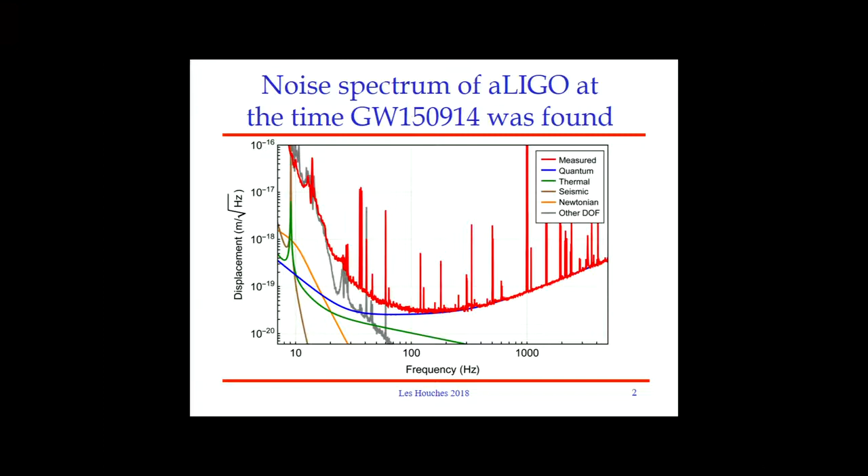Now, after paying everyone a compliment, I want to tease everyone. I prompted you all last week to be prepared to challenge Stefan when he came here with the question of how much is understood about how often we get to the modeled low frequency noise and how hard it is to achieve that. So please hold his feet to the fire, or maybe their feet to the fire as designers, to make sure that if the taxpayers of Europe or the United States or the world are going to spend $1 billion on one of these low frequency detectors, it's going to work at low frequencies. So please do this with both boldness and humility.

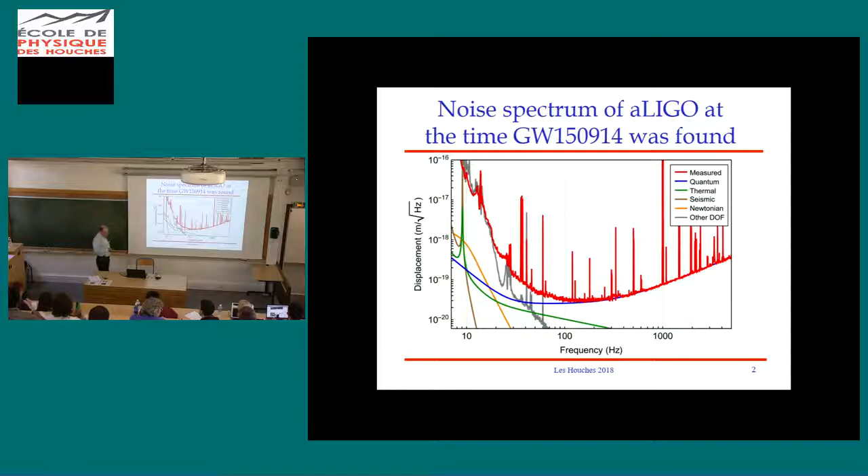In the course of my prepared material today, I'll say something else about boldness and maybe lack of humility. So to motivate what I'd like to do to finish up my presentations for the school, I went back to a slide I used a few days ago.

I tried to make the point that gravitational wave detection is so hard as to be considered nearly impossible. Looking back at that, we've talked together about building the raw sensitivity, how an interferometer can be shot noise limited, and how the shot noise can be made low enough to achieve this otherwise astounding precision. I had one mealtime conversation over this, but didn't make much prepared material.

If you're still wondering about that, we can talk more about it over lunch or dinner, about how we can do this with things made out of atoms. We also talked about how to tame the much larger mechanical noise sources, at least several of them, featuring seismic noise and thermal noise in particular.

But today I'd like to talk about a subject that is mainly about achieving this last challenge on my list of nearly impossible challenges: namely, how to do all of this given that in order to have a quiet, well-isolated interferometer, and one whose response to gravitational waves we can understand, we need to use free masses. But nevertheless, we need the interferometer to work as reliably as Michelson's original interferometer, where he and the people who helped him built incredibly stiff, beautiful, rigid mounts to hold all the optics. So that's actually a really interesting challenge.

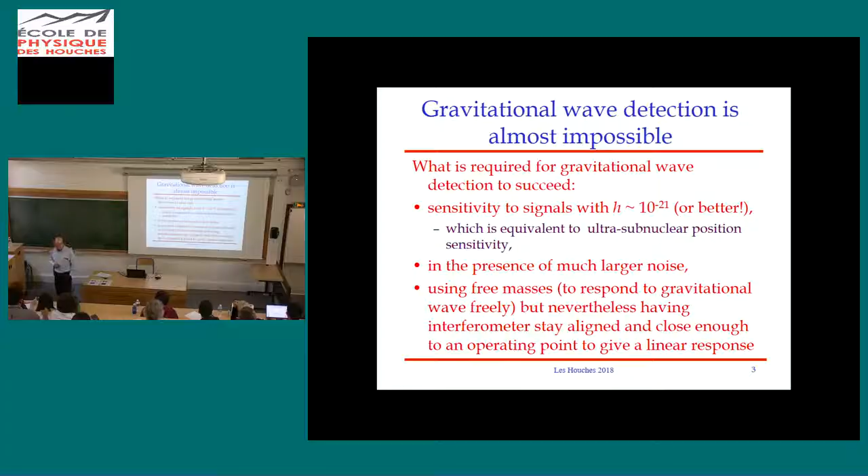And it's also a challenge that involves, I think, some of the most beautiful technology in our field. This is the field called control systems. By the end, I hope to convince you all that this is both magic and beautiful—magic in the sense that it seems like it shouldn't work, beautiful in that it's incredibly powerful, and powerful in a way that we as physicists can understand.

I'm making the 'we as physicists' point because it's a matter of great pain to me that physicists aren't generally, in our standard education, taught anything about this. It's relegated to departments of engineering, at least in the United States. You all from other educational systems can tell me if it's any different elsewhere, but it's too beautiful to be left to engineers. Physicists should claim this material, so I'm on a campaign for that.

So after I talk about control systems in the abstract, I'll walk us through a few examples that play roles in various subparts of gravitational wave interferometers. The simplest one to look at is active damping—damping with a control system rather than with material friction. And maybe we'll work through a bit of how active vibration isolation works.

But then I want to talk a bit, not so much from the point of view of formal control design, but from the point of view of war stories, about locking some of the really twitchy aspects of gravitational wave interferometers. One of them is just an individual Fabry-Perot cavity itself; the other is a whole interferometer made up of multiple coupled Fabry-Perot cavities. By the time that's done, I think you'll have a sense of how we've come up with a rigidifying function without actual rigidity.

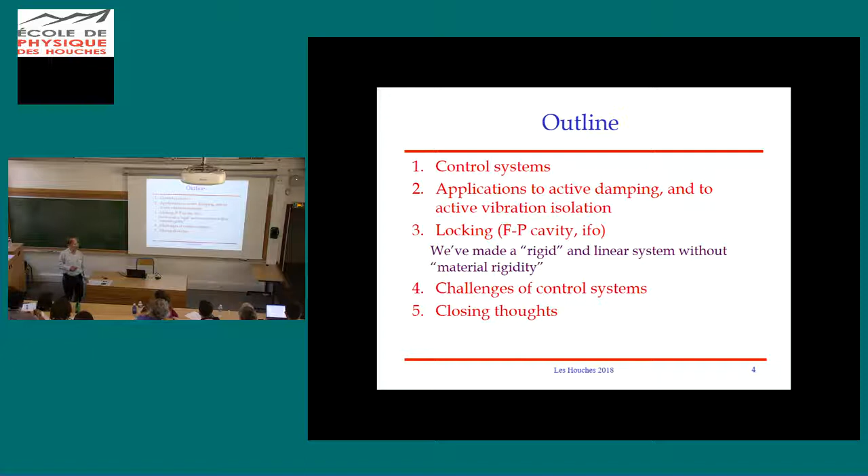We'll see what the challenges are, and then I'll try to wrap up a bit.

So first, let me just show you a few pictures of things that we know already based on things we've talked about before that we need to control. And one of them is the length of a resonant cavity.

You can think of this, if you want, as the world's worst scale drawing, representing a 4-kilometer long arm cavity. Here is an end test mass with its highly reflecting mirror, and here's an input test mass with its partially transmitting mirror, so light can couple in through the substrate.

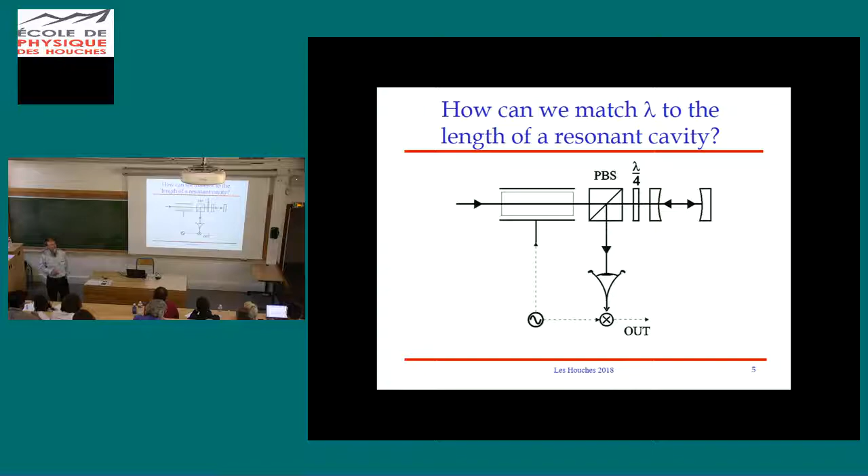I won't, at this moment, tell you exactly what all these components are, other than to say this is a schematic representation of how you can set up a system that can do two functions: one is to sense whether the cavity is on resonance or not, and the second, not so well diagrammed here, is to somehow act on the cavity so that if it's not in resonance, to drive it towards the resonant state we want to keep it on. So this is a system we'll want to control, and I'll talk something about it.

Here is a very simple looking diagram, a sketch of a test mass suspended as a pendulum, and every interferometer design that I know has at least one pendulum stage, because this is the best way to get low thermal noise and seismic isolation. But remember, if we want low thermal noise, we want very high Q. And when I showed you the benefits of high Q in a graph of a thermal noise power spectrum, obviously, we want that high Q.

We want to put all that half kT's worth of energy in the resonance and make those wings very low. I don't think I sufficiently reminded you all that, but I think we did talk about it in response to a question: that a high Q pendulum means it gets disturbed for any reason and it oscillates for a really long time.

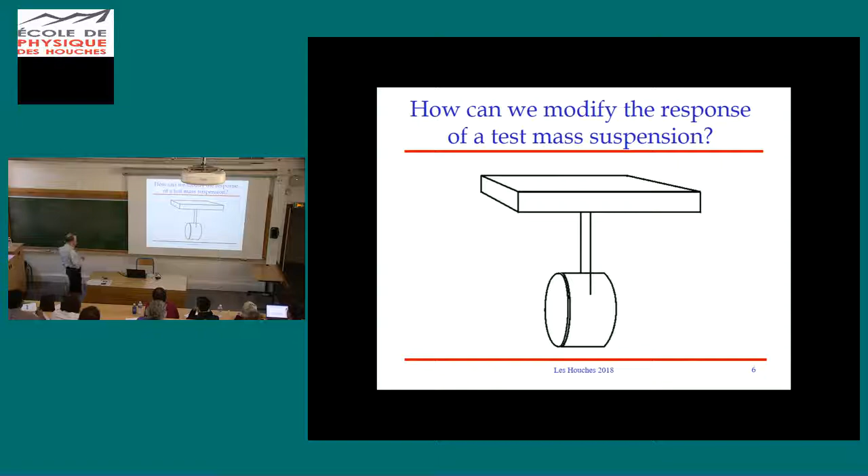The notion that we can let that ring down once and never disturb the test mass suspensions again is unrealistic. I've never seen an interferometer go without disturbances for more than a day or a couple days, and some days are much worse than that. So the idea that maybe we want to somehow, in some delicate way, modify the behavior of a test mass suspension while not ruining the noise properties that led us to that design in the first place is something we'll talk about.

As yet another example, let's think about whether we can supplement the vibration isolation you get from connecting masses through springs, maybe cascading several such stages. That's our prototype of vibration isolation, but maybe there's a way to use control systems to modify the properties and actually improve the vibration isolation beyond what's easy to engineer with strictly passive mechanical techniques.

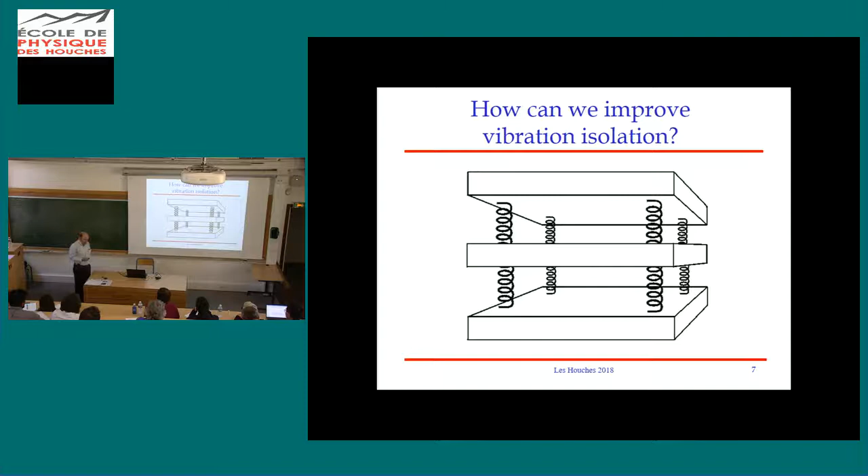I'll at least suggest that, and maybe more. And finally, we will spend some time talking about how we get the equivalent of this stone table and these beautifully rigid mirror mounts of the advanced Michelson interferometer from 1887, without the rigidity and without the mounts, where adjustments can be made automatically and remotely, not by some assistant having to go over and turn a screw.

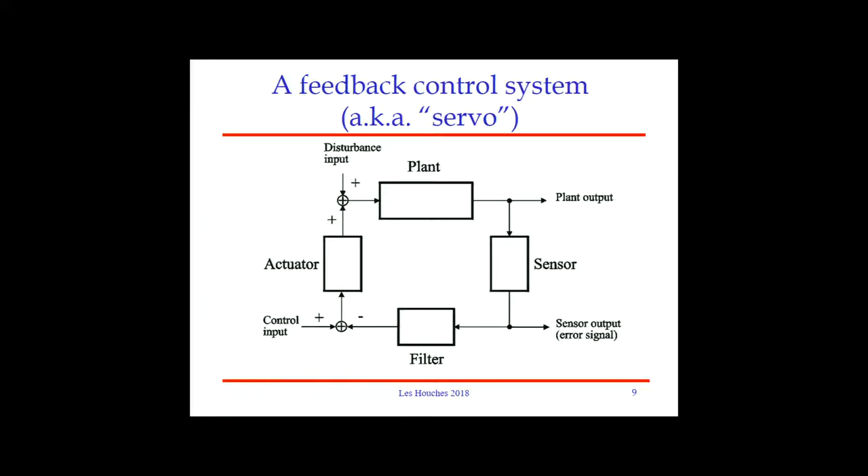Here is a diagram where I want to introduce the key concepts of what a control system is, based on feedback. I'll sometimes call this thing a control system, sometimes a feedback system for reasons that will become obvious in a moment, and sometimes I'll call it a servo.

That's slang. Servo mechanism is the longer term that some journal editors will insist you write in a paper. The word servo itself is grabbed from Latin, I believe, servus, meaning slave. So this is a kind of automatic slave that you don't have to pay to do work that you would otherwise need doing. We're going to stare a lot at this diagram, so let's get familiar with the different generic parts.

The terminology is pretty standard in the servo engineering literature, so it's worth learning. First of all, I should step back and say, what are these rectangles and lines? This is a so-called block diagram, and in it I'm going to represent a system that has an input and an output and a well-defined linear relationship between input and output. I'm going to think of a generic system as consisting generally of 4 different linear systems.

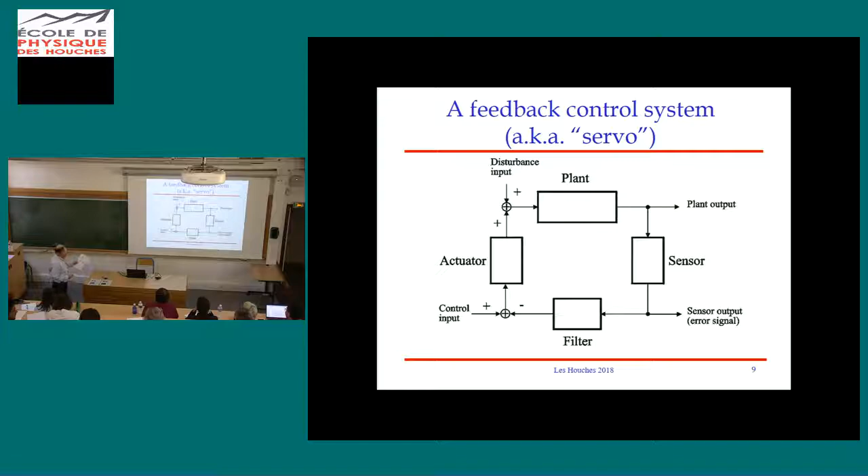Let's talk about some goals. This is actually a really important goal for us, even though it seems like the most boring thing in the world. One of the most important uses of feedback or of control is simply to hold a plant near a chosen operating point. Sit still, please, okay?

Sounds boring, but we can already see why it's so crucial, because we are looking for these influences that are as close to zero as anything measured, in an environment that would tend to make the interferometer move a lot. Part of the reason that's so horrible to contemplate is we are making our measurements of differential arm length or gravity wave strain with a readout system, those resonant Fabry-Perot cavities, that only give a linear phase response to a length change in a very tiny region. So unless the interferometer is sitting very close to the operating point, not only would you say there's a lot of noise, the signal is absolutely meaningless.

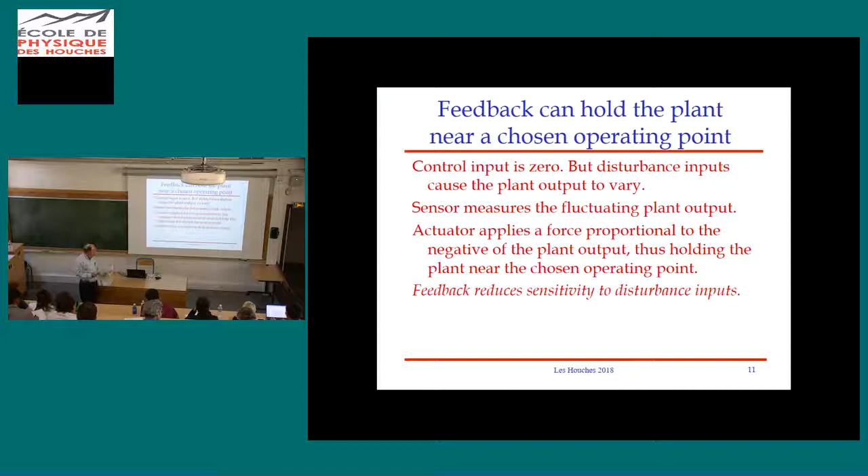I'll remind you of that again when I show you the characteristic response of a cavity readout system. But it is crucial to reduce the sensitivity of the plant that is a free mass interferometer, reduce its sensitivity to disturbance inputs. Otherwise, we can't make any sense of the output. Another kind of goal for feedback is to simply modify the dynamics of a plant, to take something that's a high Q oscillator and make it behave as if it's lower Q without wrecking the noise advantage of the high Q mechanical system in the first place.

Rather than reading all these words, let me show you in a moment an example where it's obvious that our goal was to modify the dynamics of the plant, and we'll see how a relatively simple servo can achieve that. So there can be other goals for servo systems as well, ones that involve more interesting uses of the control input.

A lot of this technology was first worked out in the 1940s during the unhappy period of the Second World War, when the question was: can I figure out a way to aim an anti-aircraft gun to hit a plane more reliably than a human operator? So sometimes you actually want to aim something. That doesn't have an exact analog that's very interesting in our business, so I won't stress that anymore here. But holding the plant near a chosen operating point or modifying dynamics, both of those are really important for us.

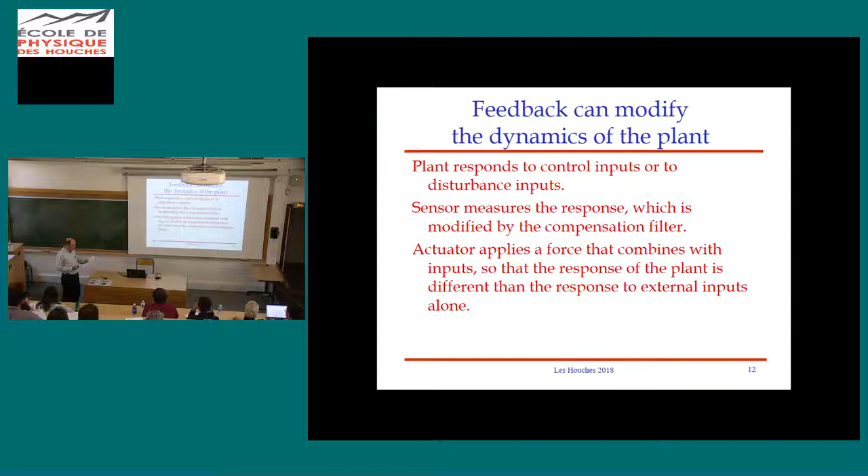Now, sometimes there are situations where you can only make sense of the behavior of a system you want to control by working in the time domain. I know of such situations, and God save you if you're in one of those. It's hard. The much easier situations to understand are ones where you can think entirely in the frequency domain. So I'm going to have us focus, except for one other parenthetical remark later, on situations where all of our physics analysis and understanding will be done in the frequency domain.

So we'll think of the plant that has a ratio of its output to its input represented by a function of frequency, capital P. The sensor gives an electrical output to a mechanical input with a ratio of output to input represented by a function of frequency, capital S. The filter is a dimensionless electrical input, electrical output box with a ratio of electrical output to electrical input represented by the function capital F. And the actuator is an object that gives a mechanical output to an electrical input ratio represented by the function of frequency capital A.

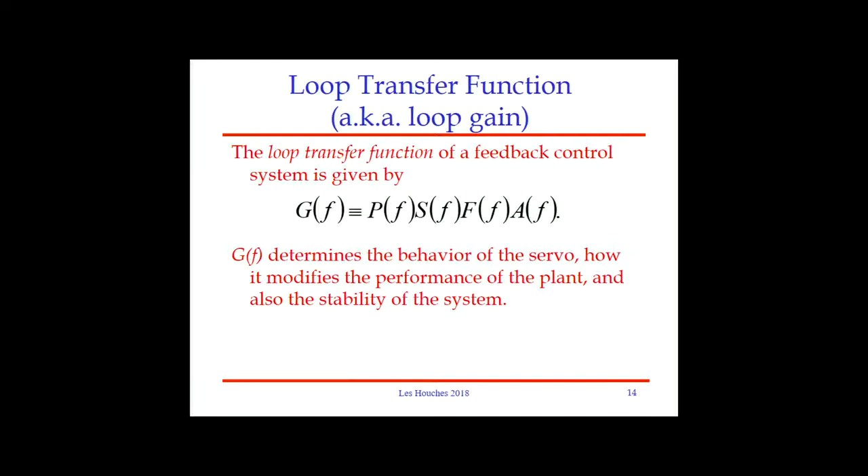But as long as I'm in the frequency domain and satisfying the requirements of the frequency domain that everything is linear, then the entire action of all those cascaded components around the loop is simply given by the product. And that product contains everything we need to know about the behavior of the servo. So we give it a special name, the loop transfer function, or I often hear people call it the loop gain or the open loop gain.

And in the learned literature, people try to tell you not to do that for various reasons. I may switch back and forth, but when I'm remembering to be proper, I'll call it the loop transfer function, the product of all of the frequency responses of all the components around the loop.

So I want to help you understand how that turns out to be as important as I'm claiming it is. In order to motivate the claims I want to make, I'm going to state a theorem, which is the most important theorem that governs control systems. This theorem says: let the frequency response H of f be any frequency response or transfer function between any 2 points in the system. If I write it with no subscript, just H of f, I'm talking about the output to input ratio between my chosen output and input, wherever I choose them, with the loop not closed — just all my components set up but not actually functioning.

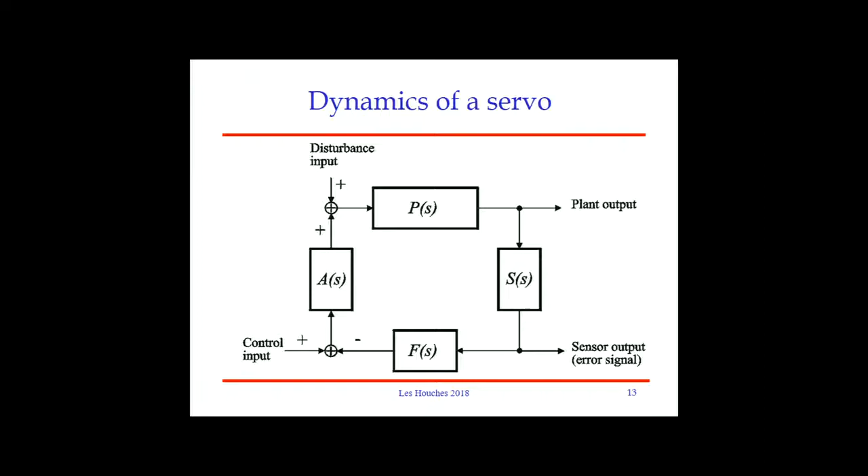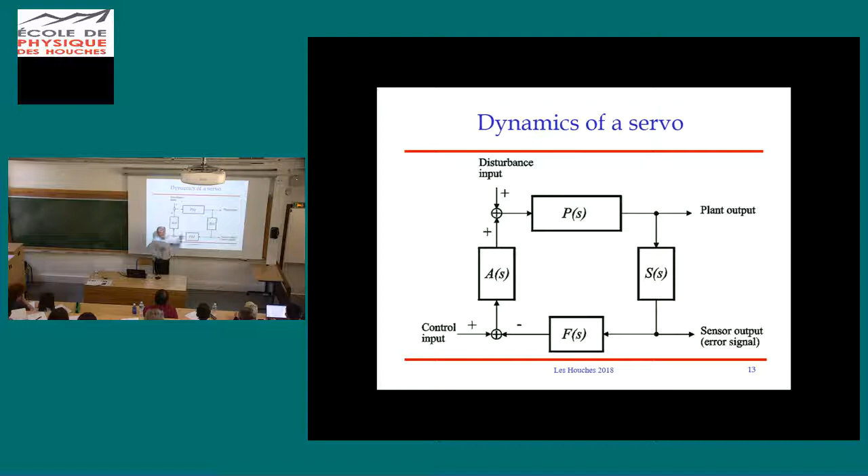Let me just, I'm taking for granted that you understand something that you might not. Every servo needs a switch, because there's a lot of times when you don't want it to be operating. So either imagine that this wire can be pulled and disconnected, or maybe this one or this one, it kind of doesn't matter. Just imagine that there's a switch where you can literally undo a part of the connectivity of this diagram. In case that wasn't obvious, and there's no reason it should have been.

Okay, so now here's the theorem. If I have my original open loop, uncontrolled frequency response or transfer function between a particular chosen output and input, the closed loop version of precisely that same frequency response function is the original one divided by 1 plus the loop gain, or the loop transfer function. It's really simple to write. There's a lot of richness buried in that very simple to state theorem.

But thanks for reminding me that this is the way to see how the units make sense and that they're not ridiculous. All right, now let's try to see.

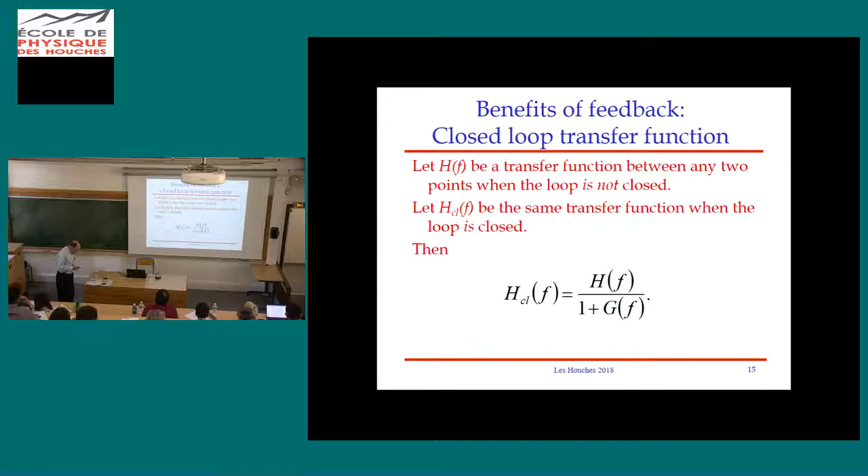I think I now want to derive this expression. So here is yet another version of that same diagram. The only other thing that I've done is added a few labels to some well-chosen signals. So the input to the plant I'm going to write with a lowercase i for input, and that input is equal to the sum of the disturbance input added with, in the closed loop case, the actuator input. I'll call the output of the plant P, and I don't think in this derivation I need names for any other signals, so hopefully I remembered correctly.

So let's see if we can make sense out of the logic of feedback in a way that will let us understand that theorem. So the first thing I want us to see from the logic of the summing junction is that the input to the plant, i, is equal to the sum of the disturbance input and the actuator's input to the plant. Okay, that's what that summing junction means.

Now let's think about what the actuation signal is itself. The actuation signal is the transfer function A of frequency times this signal. This signal in turn is equal to F times this signal. This signal in turn is S times P, and P in turn is i times capital P. So A is equal...

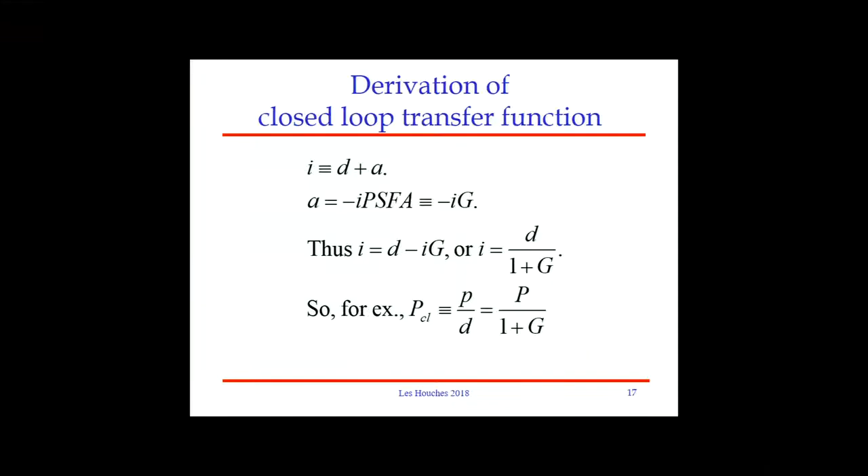I will keep taking questions, but since no one is raising their hand at this moment, I'll show the next slide. But you're welcome to -- yes, go ahead.

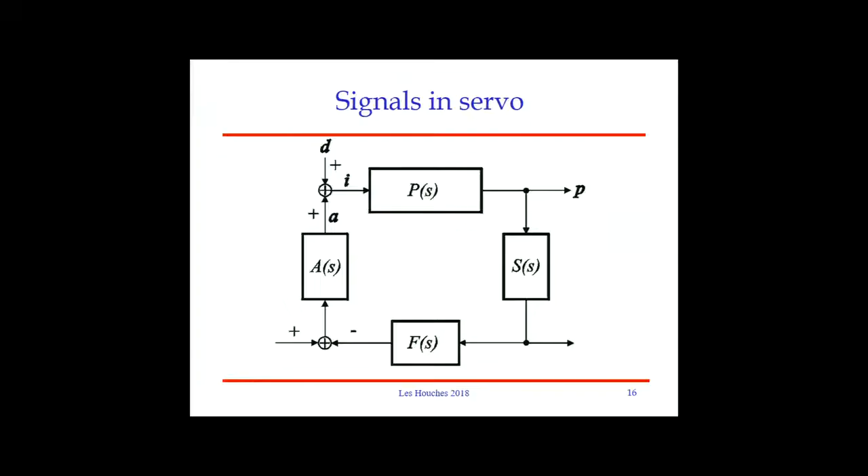So you mean, what if D is the gravitational wave? And what if, say, the sensor output is our record? You are correct that the action of feedback is to reduce the amplitude of the recorded signal, so long as we're in the regime that we're trying to achieve, namely where G is big.

However, I may not care about that. Here's why: at the end of the day, I want to know what would have been the response of the plant to the gravitational wave input.

If I reduce it for technical reasons, because I need to stay within the linear operating range, I've changed the calibration of the signal I would have recorded to disk down to something smaller. But if I've done that in a linear way, with components well chosen so that I don't artificially reduce this signal below the level of the input noise of the amplifier I'm using at the input of my A to D, then as long as I'm not in those situations, I don't care. I just need to keep track of this as part of the calibration.

Yes -- if your electronics is bad enough, it can introduce additional noise. It's one of the challenges of control engineering to ensure that you never use an amplifier that has too much noise referred to input, so that this comes to pass.

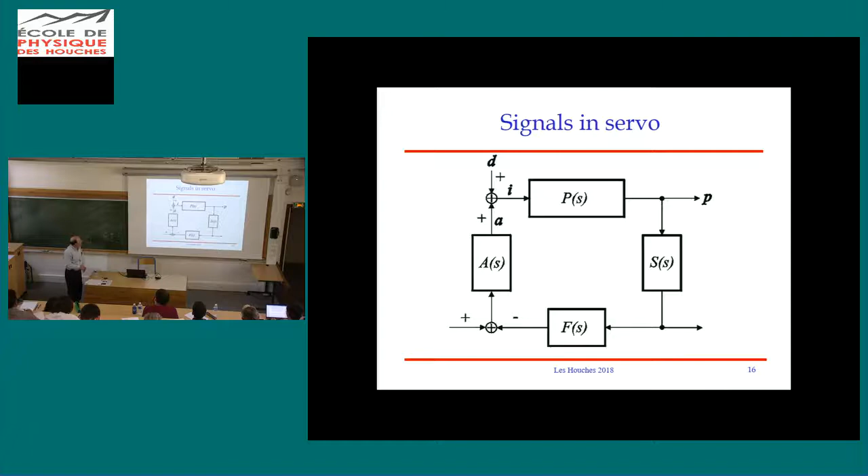All right, I'm going to talk about this slide unless someone raises a hand.

So this being the key theorem, I think there's something interpretable about it. First of all, for the very common situation where our goal with our servo is to hold something close to an operating point, we can see what is the key desideratum of that denominator, 1 plus G. It is that 1 plus G be as big as possible. We'll see other situations where that's maybe not our goal, but in any case, 1 plus G in the denominator is how we modify the behavior in the absence of control.

And there's a few interesting limits: 1 plus G huge, G much less than 1 so that 1 plus G is just 1, and then the really tricky case where 1 plus G is of order 1. Remember, G is a complex function of frequency. So G could be minus 1 and then something horrible happens, or it could be i, or whatever. So we've got to keep track of phases as well.

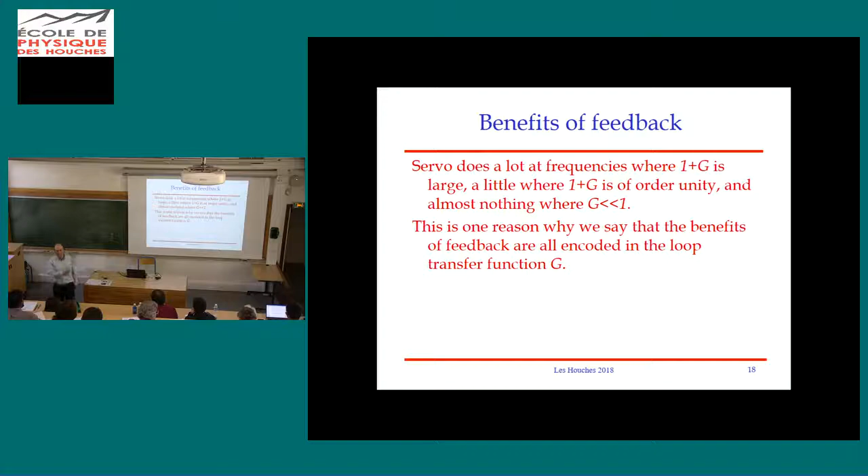All right, so this is the key theorem. All of the benefits of feedback are encoded in the loop transfer function, because this is the key theorem.

Now, let's talk about an example, and this particular example has dynamics I think are simple enough for us to do graphically. It's not a case where what we want is G huge, but we want some other benefit of feedback from this situation. So here is the problem.

We've got this high Q pendulum. We don't want it to ring for hours after a disturbance, because just locking the interferometer is a disturbance, and we want to be taking data. So we want to somehow modify the dynamics of this pendulum.

So that's the basic layout, and we have to see whether we can figure out how this servo ought to work and whether we can make it do what we want.

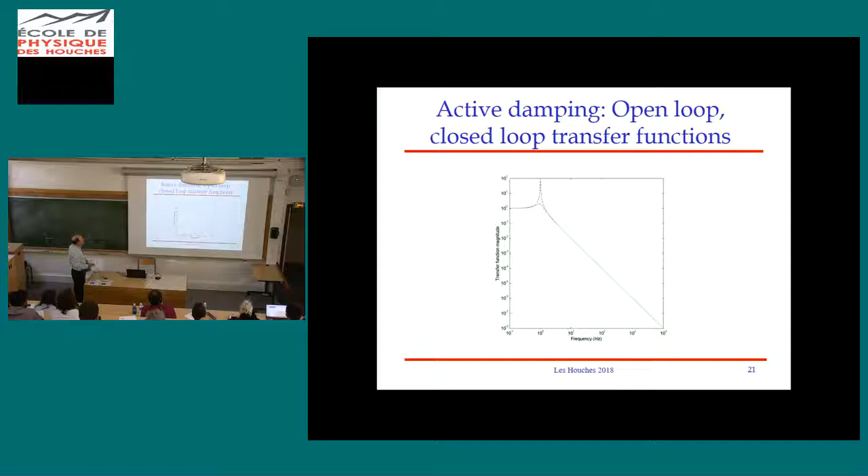Okay, so we've changed the dynamics of the plant, and mindful of the time, I am just going to wave my hands about my next example. There's the graph of what we just showed. This borders on the miraculous, but I don't know that we have time to analyze it in detail.

Maybe I would like—that's the plant transfer function—maybe I'd like to help it out. You can imagine helping it out in the following way. You can imagine building a sensor that looks at the difference between the position of this mass and this mass, that is to say, at how much the spring is compressed or stretched, and then apply a control force to this mass. It's not the only thing you can do, but you can do that, and you can ask what that does.

Here's some hand-waving insight to build some intuition. When does this spring depart from its rest-loaded length? It departs from its ordinary loaded length when this mass is either accelerating upwards or downwards. So the measure of the length of this spring is a measure that this mass is not sitting perfectly still. Even though it is isolated, it's still being shaken somewhat.

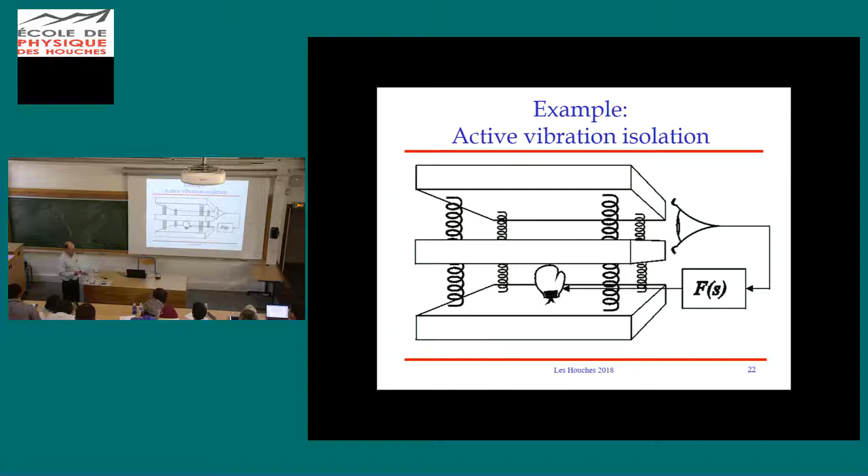And I've built some things like this and turned it up too high and almost destroyed them. Instability in mechanical servos is a frightening thing. So there's always a limit to how high you can turn up G, and it's usually because you've lost control of the phase at high enough frequencies, and you have to ensure that the denominator 1 plus G can never become too small.

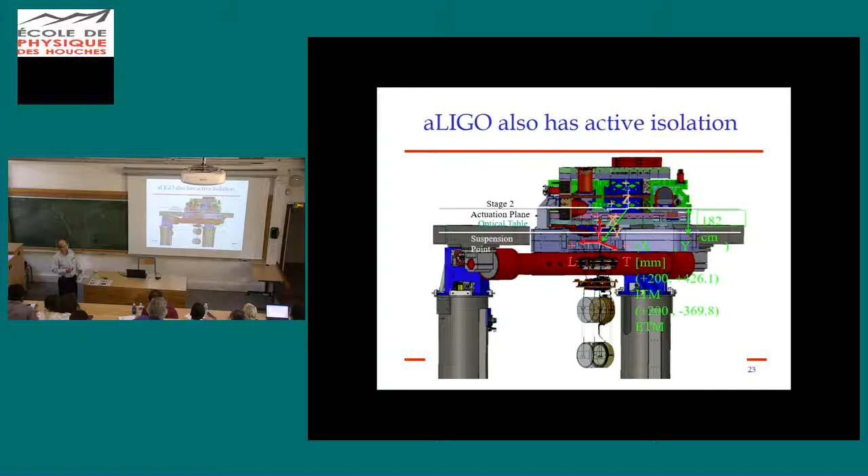Nevertheless, this can be made to work. Here's a slide I showed you before that's almost indecipherable, that represents the fact that two stages of a system like this are built into advanced LIGO and are working routinely and well. Here is something I would have taken more time on, but this other stuff was more important to talk through slowly, that shows how it's actually built.

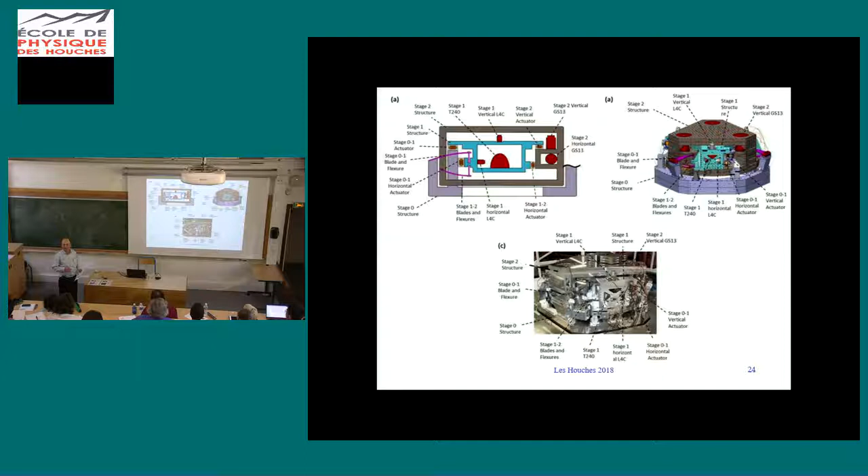But the key thing is that there are platforms and there are seismometers, which are suspended masses on springs, so they play the role of the top platform. Now, this would be kind of complicated to do anyway, so I will instead tell you war stories of how it is that you lock a resonant Fabry-Perot cavity using the Pound-Drever-Hall technique.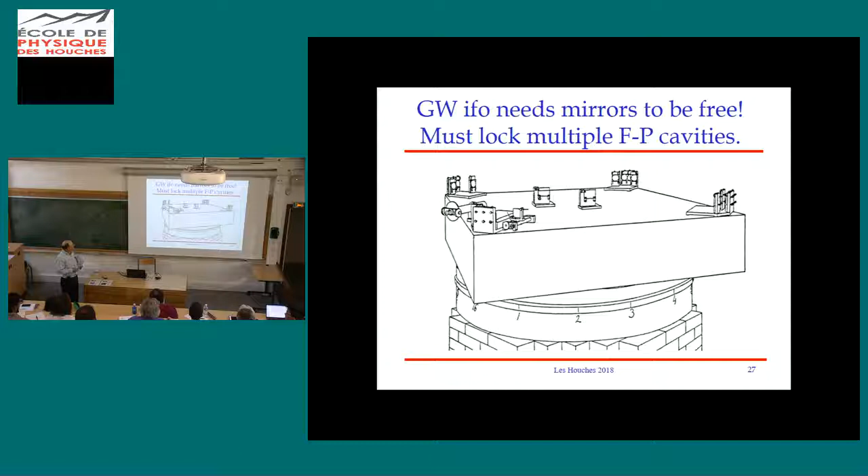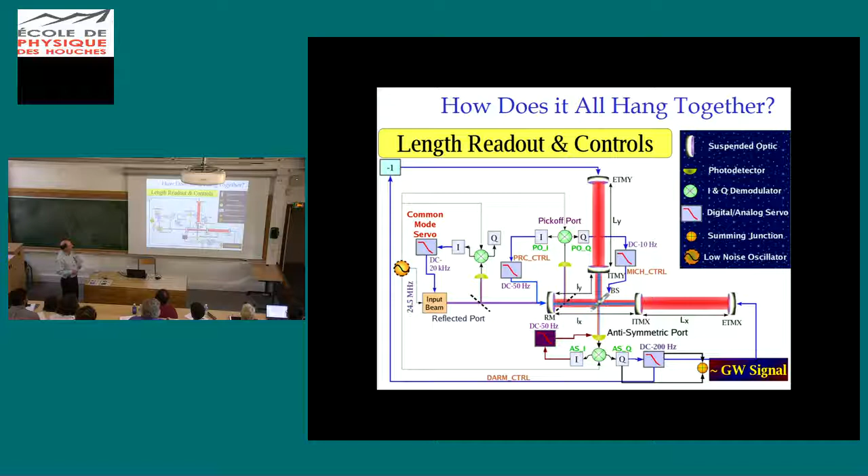You cannot control a system with a nonsense error signal. You need an error signal that is a linear relationship to the thing you want to measure and control. And we need to do this over and over and over, for many degrees of freedom. There are four key degrees of freedom and a gazillion auxiliary degrees of freedom, that's a technical term, in the length control and in the angle control.

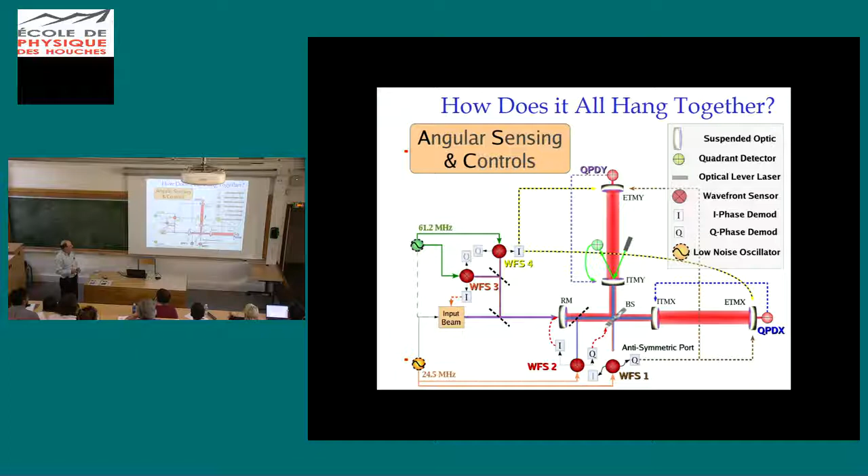Angle tends to be less twitchy. It doesn't tend to have this problem the way the Fabry-Perot degrees of freedom do. When you're trying to lock cascaded Fabry-Perot cavities, if you're not smart, sometimes you'll lock one cavity, sometimes you'll lock an arm, sometimes the other arm. To get everything resonating is difficult.

Here is the horrible thing. It's okay to confess this: when we asked for the several hundred million dollars to build initial LIGO, we did not know at all how to lock it, how to simultaneously get all of the cavities together to lock. And when we finished installing all the components at the 4-kilometer sites, we still did not know. So what did we do? We gave it to a grad student. Said, okay, your project is to save LIGO.

A really good graduate student, Matt Evans, right? And he did it. But I'll now tell you the story. It was the 20th of October, 2000. We had blown through 230-some million dollars. And only on that day did we know that we could make the thing even begin to work.

I didn't grab the slide from the report given by Stan Whitcomb later that day where he showed the first noise curve and he said, we have to reduce the noise between 5 and 6 orders of magnitude.

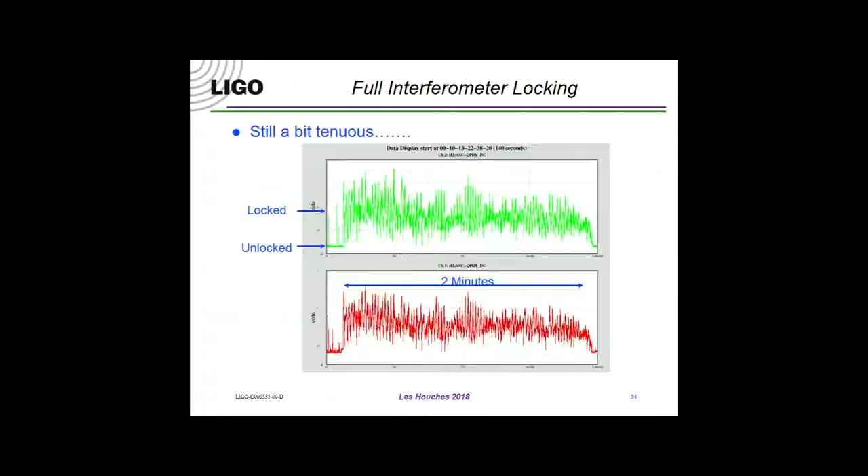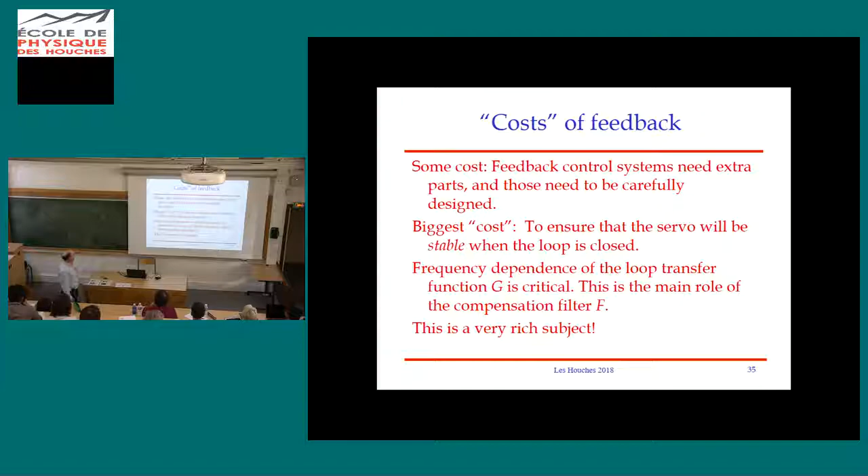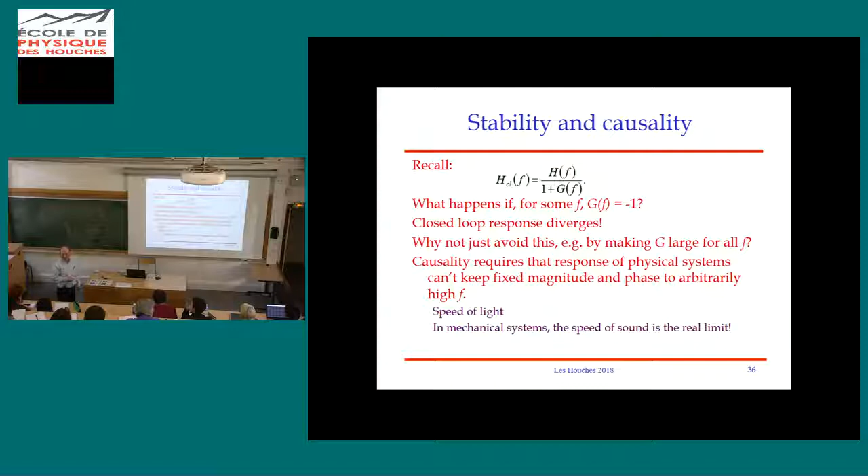It's hard to keep things stable. It's very hard to simultaneously have servos be stable and have G be as big as your customer wanted it to be. That's what's hard. Every time you think of a way to change the filter to make G bigger in some frequency range, the Kramers-Kronig relation bites you and affects the phase in such a way that it takes away a huge portion of the advantage you thought you built in. If you are not a master of complex analysis, you can't design filters properly to do this job.

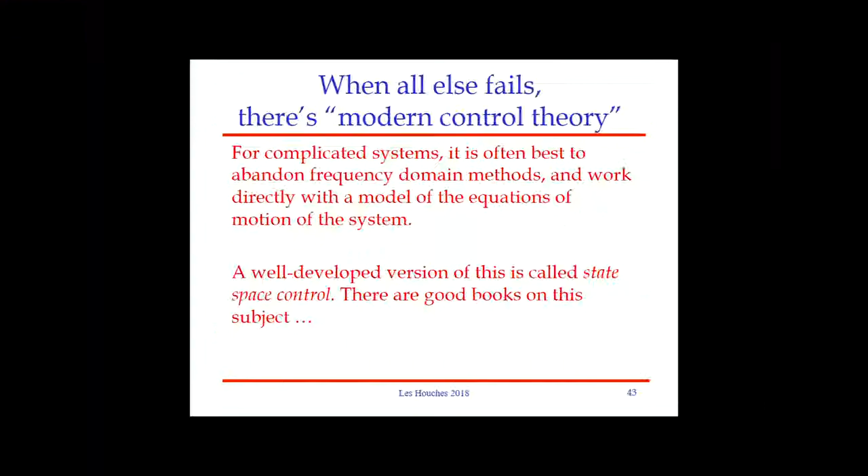I want to, since it's lunchtime, just close with a few personal remarks. I've been struck by feeling the spirit of Cécile DeWitt-Morette here. She made too small an appearance in my first lecture. She and her husband, Bryce DeWitt, were the organizers and conveners of the Chapel Hill Conference in 1957, which played a fabulous role in our field by resolving the worries about the reality of gravitational waves and launching the program to find them. If she had not been doing that job in 1956, leading up to that 1957 meeting, none of what brought us here together would have happened.

Thinking of her makes me realize how much gratitude we need to feel and occasionally to articulate. All right, we're having a fabulous time here. The place is beautiful, the food is great, the program is well organized, you students are really active and engaged. It's wonderful. Partly that's due to us, let's say, but it depends on so many more people than us. We should not take for granted what Pierre-François and Marie-Anne and Nelson and Bruce have done to bring us together, but the list of people we would need to thank goes on and on and on.